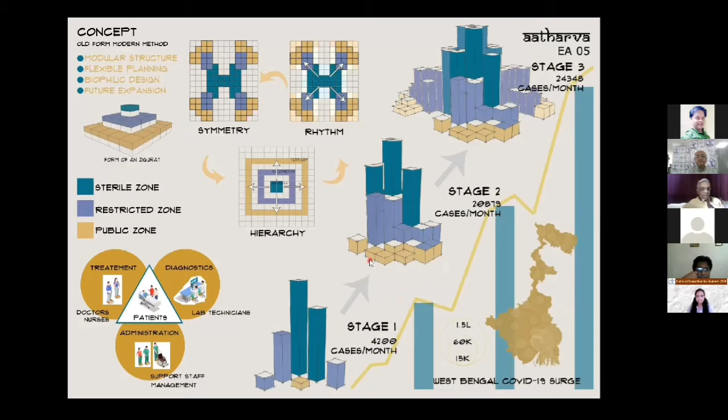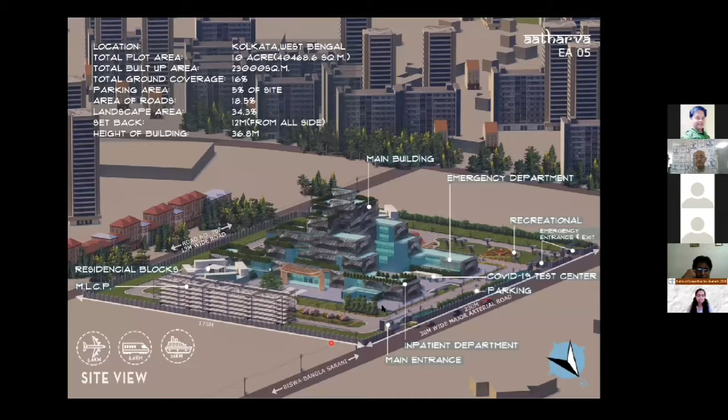Moving here, our site dimension is 230 meters by 175 meters, a regular geometry of 10 acres. There is a 30 meter wide road towards the north of the site, and a 13 meter wide road towards the south of the site.

We have placed our main entrance here towards the north, and our emergency entrance-exit here, also towards the north. We have also given a service entry from the 13 meter wide road towards the south side.

Our main building is placed at the center of the site, and the residential blocks are placed on each side of the main building. Our MLCP is on the west side of our site.

Our ground parking is located between the entrance and the exit to maintain a unidirectional flow of people. Here is the COVID-19 test center opposite to the parking.

From this view, the main feature of our hospital is the multiple terrace gardens. By giving this facade, we try to create a building envelope which will help us create a microclimate in the hospital.

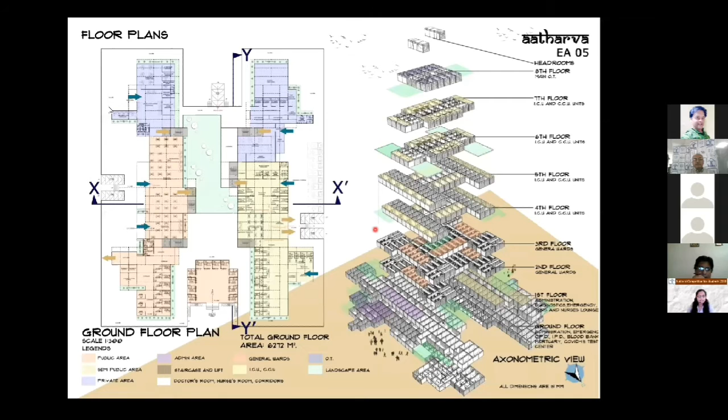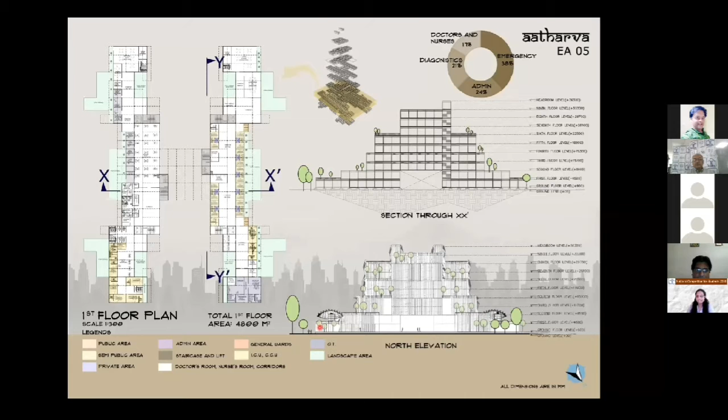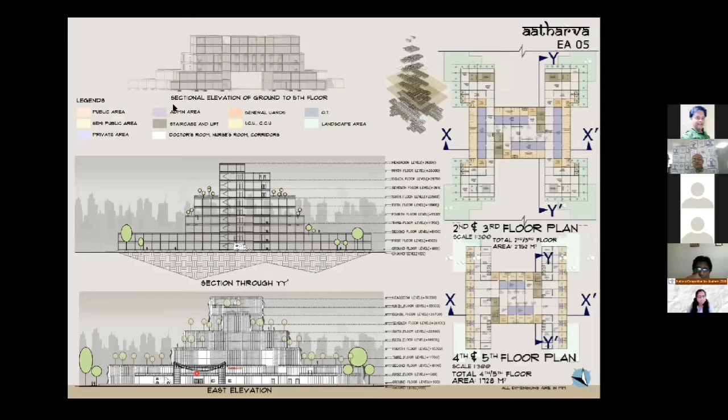This is an additional elevation cutting the second floor. In the second and third floor, general wards are placed over here. From 4th floor to 7th floor, ICU. In the 8th floor, major OTs are placed.

As you can see from this sectional elevation, different terrace gardens are present at different levels and accessible from different departments.

So this is the isometric view of the 6th floor, showing the placement of ICU and CCU units in the hospital and its circulation and arrangement with respect to the core.

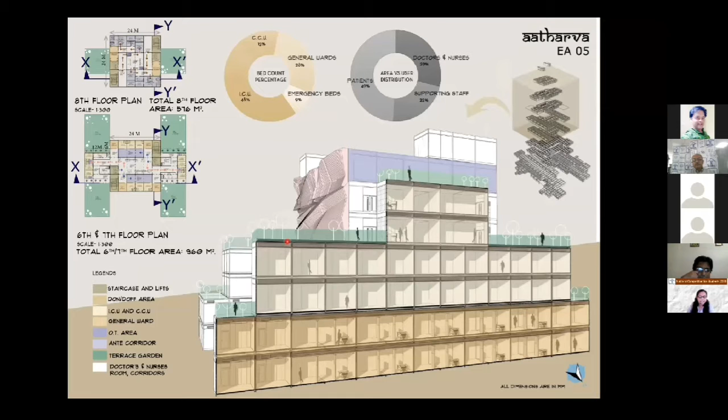Here is the staircase and lift which is opening into the 6th floor corridor. Here are multiple monitoring stations present in the corridor, keeping in mind the severity of the patients.

As per COVID norms, the ICU and CCU beds should be placed in separate zones. We have placed the don/doff area beside the ICU and CCU units. We have to access the ICU units through the ante-corridor, which will ensure negative pressure and restrict further spread of the virus.

At each and every floor, we have placed a doctors and nurses area. It may help them act in case of emergency.

Apart from these necessary areas, we have also provided terrace gardens, which are directly accessible through the doctors and nurses' room, making them feel better during their work time. The terrace gardens are also in visual vicinity with the patient's room, which will make them feel better too.

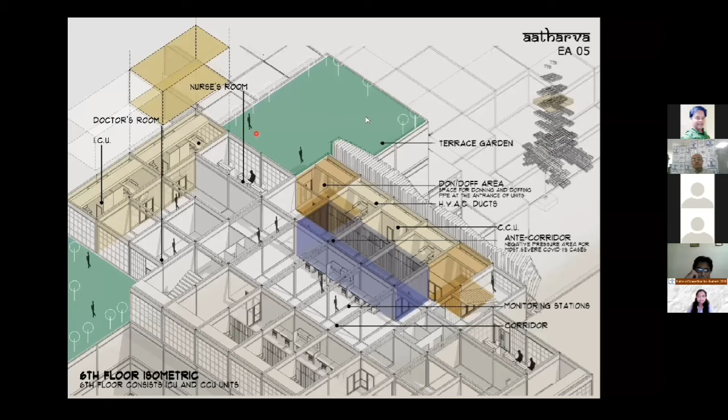Now, coming to the modular tower structure, we have mainly 3 aspects in the modules. A steel frame structure of individual modules is used here.

Single modules and tensile rope bring all the modules together. Now coming to each modular detail, we have used an 8 meter by 4 meter module, which will be easy to transport.

We have used steel hollow sections in each and every module, and in the flooring, false ceiling, and internal divisions, all the materials used will be prefabricated and pre-installed in the modules.

Now we have the materials and finishes according to the hospital needs, like anti-skid flooring coating, then intumescent paints, which will be used in the visual steel sections.

Now, here's how we first join our modules. The steel cables will be pinned at the foundation, and then the steel cable will be stretched through the columns in the modules and held in place with the use of cable grips and the module end cap.

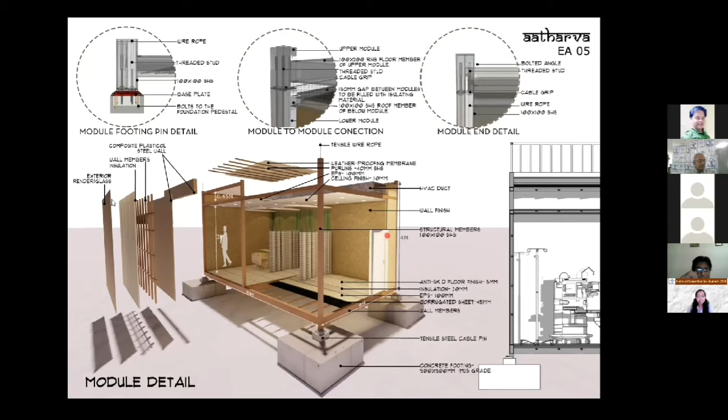Another challenge was to complete our whole construction within 100 days. So we have divided our construction into 4 phases, starting with phase 1, where plinth and foundation will be done along with the landscape layout in the site.

Moving to phase 2, we will start with our modular placement and the parking placement in the site. In phase 3, we intend to complete all 686 modules' arrangement in the plinth, and we'll start with our internal service arrangement. Finally, in phase 4, with the completion of internal arrangements and service layouts, the facade made up of steel will be installed.

The facade is mainly made up of steel sheets, which will create an air pocket between the external wall and the steel sheets, helping to reduce the energy cost to cool the building and aiding thermal insulation.

Secondly, at each level where the terrace gardens are placed, those portions will have waterproofing, installation of growth medium, and transplantation of plants done there.

Now we have used 30 to 40% steel in each module, and about 60% steel all over the building. While comparing contemporary materials like steel, glass, and concrete, steel has several benefits like reduced weight, sustainability, ductility, and faster construction time, which will help with completion.

Now, concluding with this presentation, we shall start with our walkthrough.

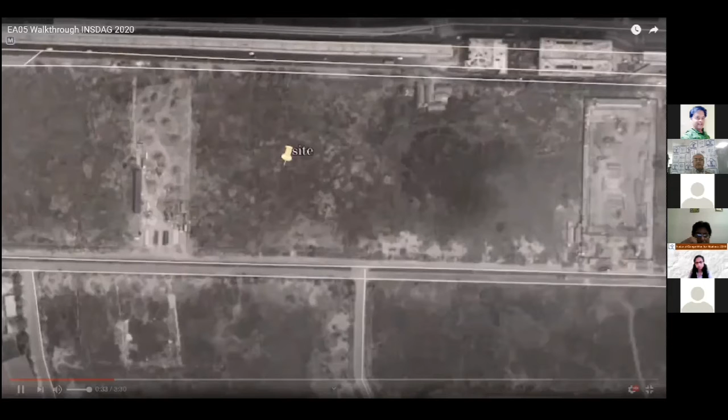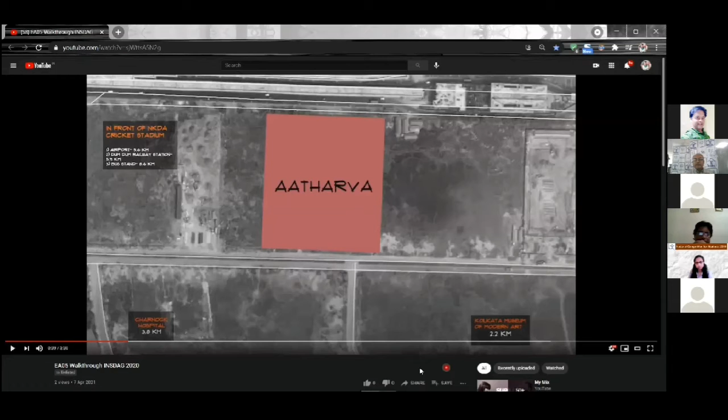Do you have any sound in it? We can't hear. Yes, I have sound, let me check. Give me one second. The sound is cut off, we cannot hear it. Let me present again. Yes, ma'am, thank you, try once more.

The visual is to be on. Alokita, the visual is not there. Yes sir, the visual is not there, but we can hear the sound now. Now the visual is there, we can see it. Okay, sound is fine, can you start again? Is it okay now, sir? Yeah, yes.

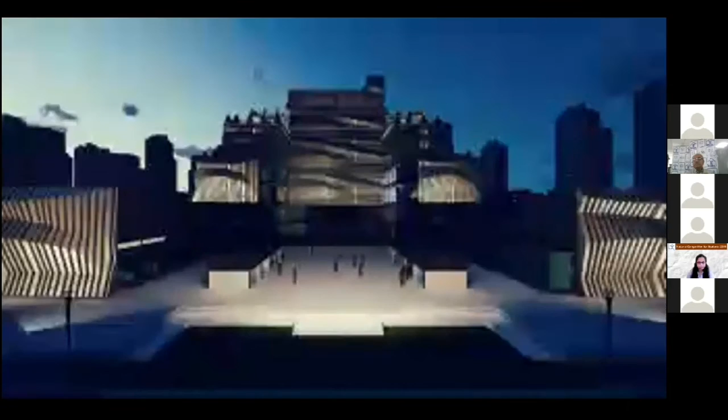Thank you. So I'm sharing the PPT again. Have you finished your presentation? Yes, sir. Okay, so I would now request the jury for their questions.

It was a good presentation. Sukanya ma'am, please go ahead. Alokita and team, right? Nice presentation, nice work, I like your planning also. What I wanted to know first is, why have you chosen this kind of facade, of steel? Can you elaborate on it?

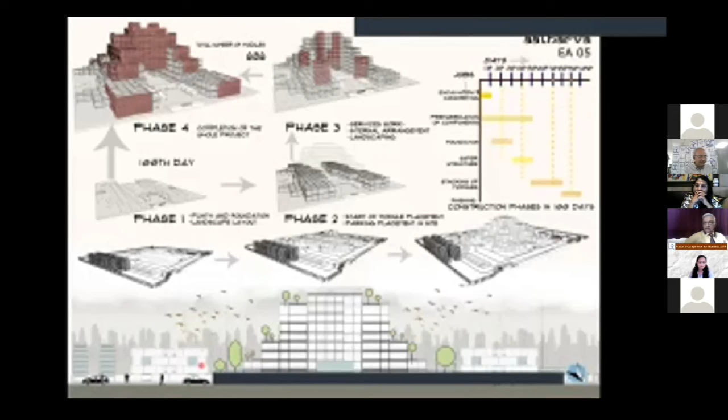May I add something? Being purely a structural engineer and not an architect at all, the first slide of your presentation slightly shocked me because of the look. I would not like to get into this sort of hospital. Why was the look like that? So maybe madam is asking from that angle - the first slide looked more like a fort rather than a hospital where some patient will be feeling very good. Just an observation, don't take it otherwise.

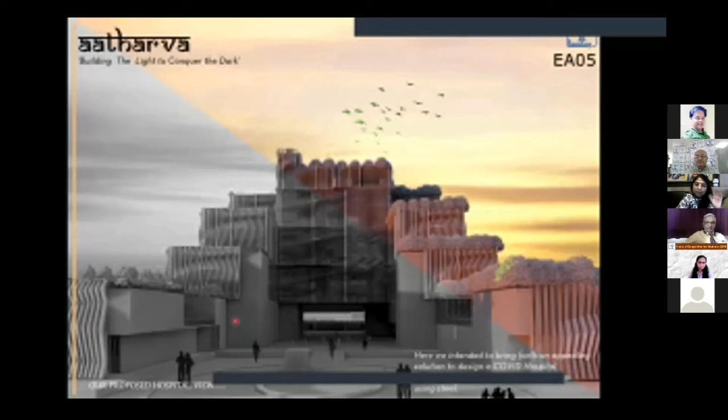I just wanted to know - planning wise everything is nice, like the terraces you have incorporated, really nice. So I just wanted to know why this kind of facade, and what is it that's on the roofs of the individual blocks - are those trees or what?

Ma'am, at different terrace gardens we have mainly planned grass on the floor. There will be grass, and for trees, we will transplant already grown trees because we don't have enough time to plant and grow trees within the given time. So we have planned to transplant already grown trees.

No, I understand, but please answer - why this kind of facade? You've used steel extensively, that's fine, but why the wavy pattern? You may have a reason, that's what I want to know.

Yes ma'am, firstly by using this facade we can avoid the chhajjas, and the facade can act as shade for the building. It's also aesthetically pleasing. We have used steel sheets in the facade, as I mentioned, with a gap between the facade and the external wall that creates an air pocket, helping create a microclimate within the building.

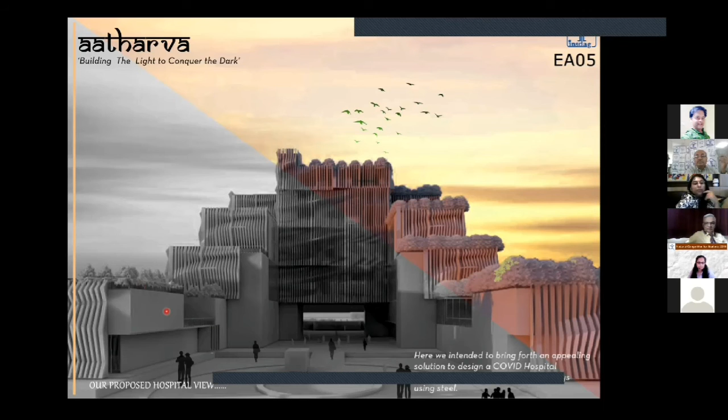Okay, so whatever shape of the steel members you used, that's for aesthetic reasons, is that what you're saying? Ma'am, not only for aesthetic reasons. You've used steel for many reasons as elaborated in your presentation. Yes, but also why the wavy pattern - that's what I wanted to know. So it's for aesthetic pleasing, right? Yes ma'am, the facade is not only for aesthetic pleasing, it helps give shade to the building and insulation. Yes, you have elaborated that.

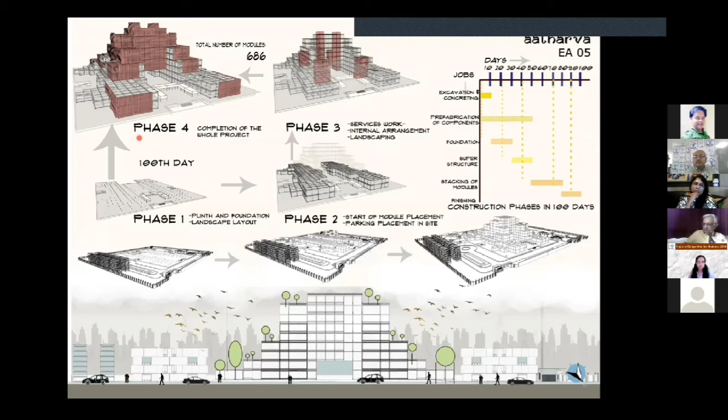Fine, and you mentioned you used an 8 meter by 4 meter module because it's easy to transport, is it? Yes ma'am. So why 8 meters and 4 meters - or does it fit your function? Ma'am, obviously it's a hospital, so the 8 meter by 4 meter module is easy to transport, install and arrange, and in hospitals we need bigger spaces, so it fits our functionality and planning. That's why we took the 8 meter by 4 meter module.

Okay, tell me the reason for placing your OTs and ICUs on the topmost floor.

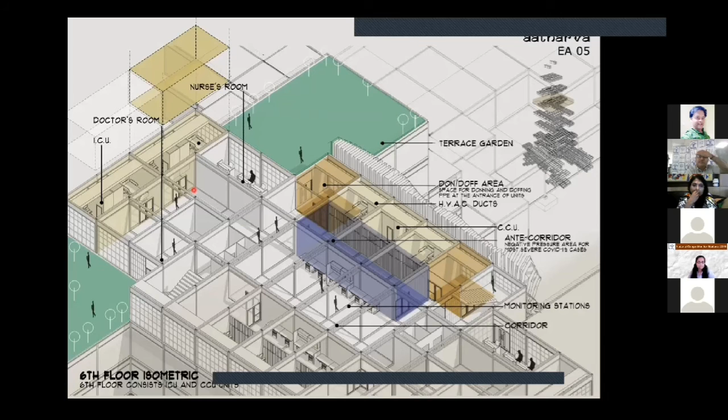OTs are at the topmost floor. The flow of public - emergency, OT, administration, IPD, OPD, blood bank, mortuary - these are areas where public may get access, so we restrict those places up to the first floor. Moving up, we have placed in-patient beds, so the public who normally come to the hospital don't need to go up for any reason. In case of OT, we placed it on the topmost floor because the most critical patients will be treated there and then shifted to ICU and CCU units. That's why we planned it like this.

In your walkthrough and previous presentation, I saw steel structures, some landscape elements - lot of steel tree-shaped structures in your landscape. What are those? Those tree-shaped landscape structures are mainly sit-out areas, which we have designed for sitting.

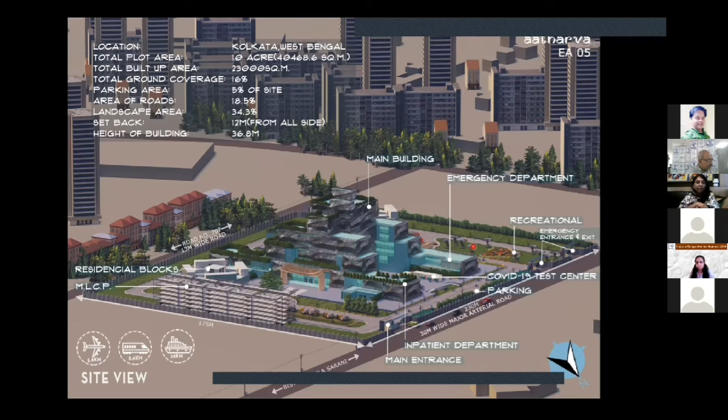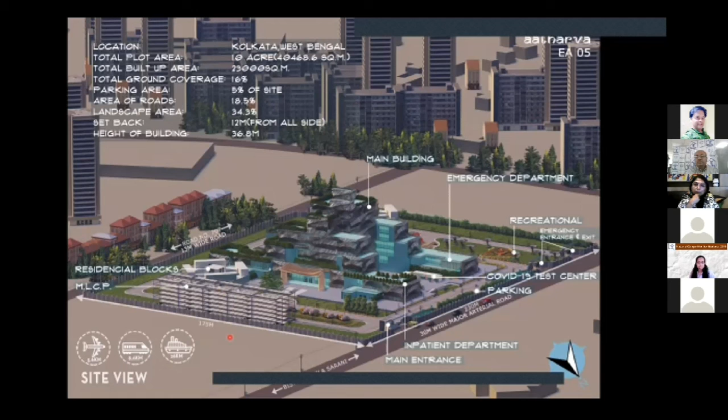Find your height of each floor. Height of each floor is 4 meters, which we have shown clearly - clear height is 3 meters and 0.45 meters for the service ducts.

Have you used AC or all naturally ventilated? In case of the CCU and ICU units and the OT, we used AC. In other zones like doctors and nurses areas, OPDs and IPDs, we have used natural ventilation. There are terrace gardens near the doctors and nurses rooms which help avoid AC in their rooms. But in ICU and CCU we have used only AC.

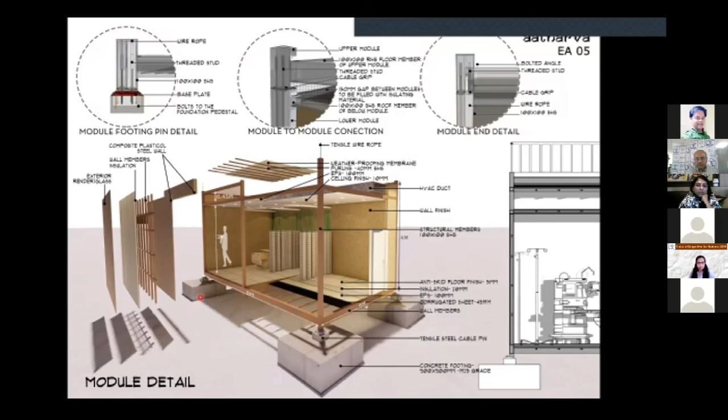Let me mention here, go to your planning sheets. I like your planning because it's a linear kind of thing - of course it is getting squarer here, so since both sides are ventilated naturally.

How much is your corridor width here? Corridor width is minimum 3 meters; somewhere it is more than 3 meters.

Okay, fine. Nice presentation, Alokita and team. Nice work. Thank you, ma'am.

Any other questions from any other jury member? Alokita, I would like to ask you one important question. Before that, two important points that I liked: the way you created the spaces and the terraces. They are very important because the psychological effect on COVID patients is increasingly being seen - they need a lot of psychological treatment. So providing open terraces at upper levels is a very good idea.

The kind of spaces you have created internally is also very good. Another point I liked is that you have restricted entry after some floors, which is important because with COVID patients there will be a lot of rush and hectic activity at the ground floor. After certain floors, when patients are quarantined for a couple of days, entry has to be extremely restricted, and that is what you tried to do in your design.